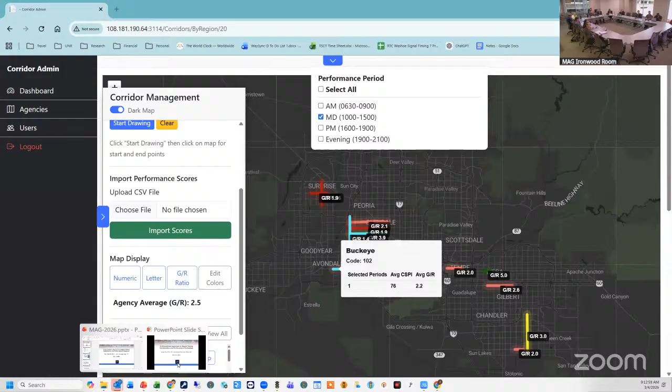Thank you, Mr. Chair, members of the ITS committee. Dr. Tian had a presentation at the most recent edition in December, I believe it was, in the ITE Journal talking about this topic. And given the work that the region has been doing on reassessing the TSOP program that we have in the region, I thought it was a timely discussion to have, especially given that many of you are familiar with the software platform that Dr. Tian has developed. So with that, we wanted to invite him to speak to us today and provide some unique insights that he has on this topic. Dr. Tian, the floor is yours.

Thank you, David, for inviting me to talk to the group. Yeah, I did plan to be there in person, but something happened. I couldn't be there. So I'll be really happy to talk to you about some of my insights about your program and maybe offer some suggestions.

The things I'm going to talk about today include these items. First, we'll briefly discuss your TSOP program: primarily, what has been done right and what could have been done better, in my opinion. The second, which is important, is about how we evaluate the signal timing, particularly coordinated signal timing on the corridor.

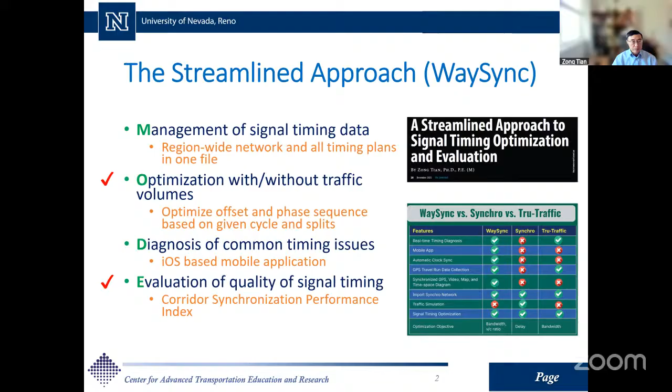Focusing on four different things, I call it a MODE approach: managing signal timing data, optimization with or without traffic volume counts, diagnosing common signal timing issues, and the evaluation of quality of signal timing. For today's presentation, I will be mainly focusing on two things: the optimization part and the evaluation. So let's take a look at the TSOP program. As I mentioned, what I think you have done well and what could have been done better.

In the program, signal timing has been done by consulting companies. Most consulting companies, I guess as required by MAG, need to show proof of validation using WaySync to make sure the timing developed can actually match what is running in the field. So that is really a positive thing. Because in most other places, everything looks good on paper, but when you go to the field and drive, it really doesn't work the way shown in the model. So WaySync provides this kind of validation. That's a positive side.

The other thing is about the evaluation. In signal retiming, the current practice is a before-after comparison. The positive side of your evaluation is that most consulting companies use a third-party independent data source, in this case INRIX travel time runs. That's an independent data source, which is very critical. You don't want the people who perform the signal timing to also collect the data and do the evaluation themselves. But I noticed the evaluations were still done by the firms themselves. So I think evaluation should be done by an independent third party. That's what I would suggest.

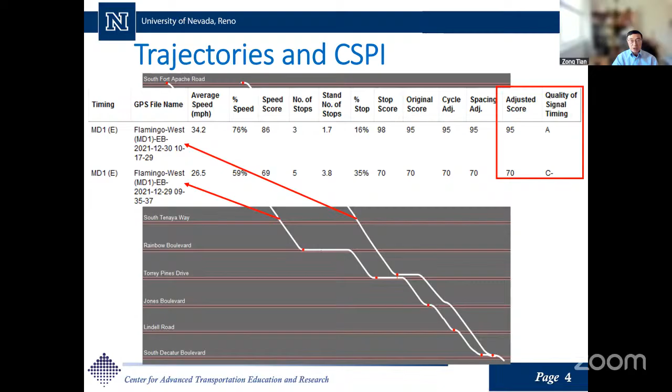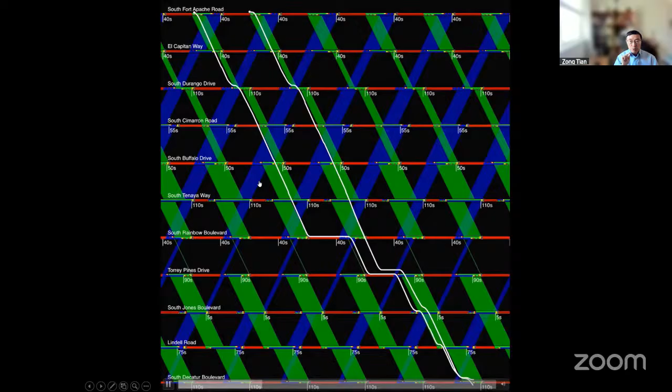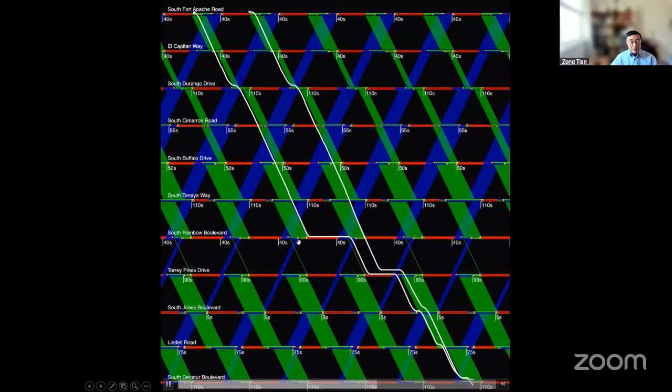What I want to show you next is why these 2 vehicles made these stops. From the trajectory alone, again, we couldn't tell the reason. But if we pull out the signal timing, now you see the true time space diagram. So the green is the band going this direction, the blue is the progression green band, the green wave going the other direction.

Now everything makes sense. You can see this one couldn't catch that green band, so it made a stop, and then because there's no green band here, made another stop. Versus the second one, probably this guy ran the yellow, you can tell, barely made it through the first one, but there's no way he can go through this one. So that's where the stops occurred.

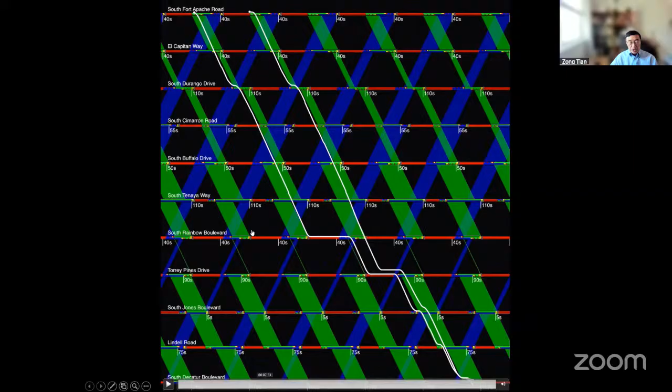So the time space diagram with the trajectories, this is what I'm talking about. If I see this, then I know why those stops occurred. I can also tell the signal timing, and you see there's not a green band. So there's a great potential to improve. Again, here is kind of a visualization. On the left, I just re-show the trajectory on the time space diagram.

On the right is the mobile tool, where you take this to the field, you drive the corridor, it will tell you whether the timing matches or not, and where you should expect to stop. For example, here you can see because it's out of the band, there's a short stop. So in 2 seconds, it's going to turn green. Here there was supposed to be another stop, but on the side street, there's no vehicle. That's why the green returned earlier.

So the next one is already green, so within the green band, you should be able to go through. Now see, this one is out of the band. That's why, in 1 second it's going to turn yellow. Now you made a long stop here, so you have to wait.

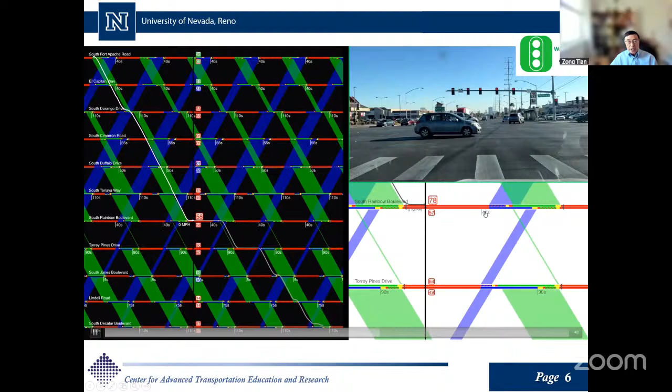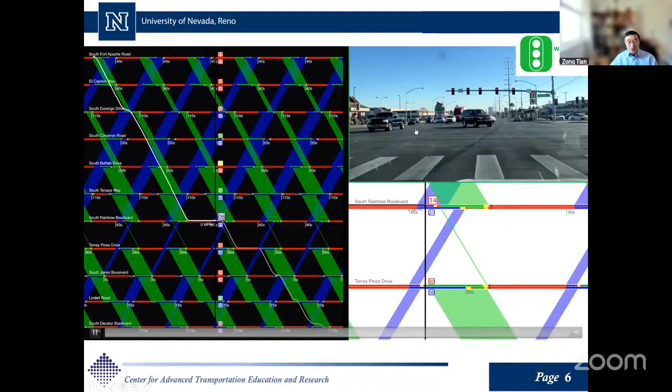So you can see the blue, the other direction, is going to start first, the left turn and through. And then in about 10 seconds, at the latest, this should turn green. Okay, now it turns green. So you can see there's no green band. That's why there will be another stop. So this is to show the time space diagram with the trajectory.

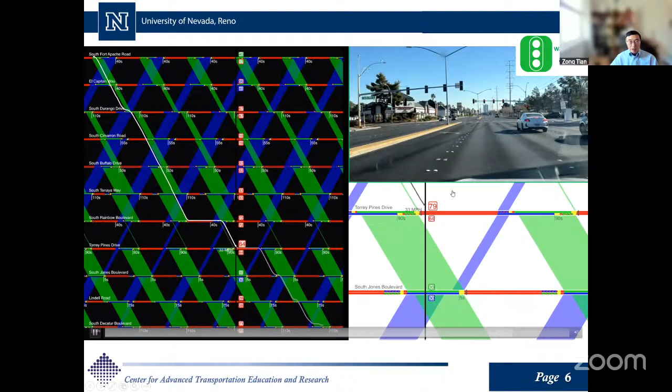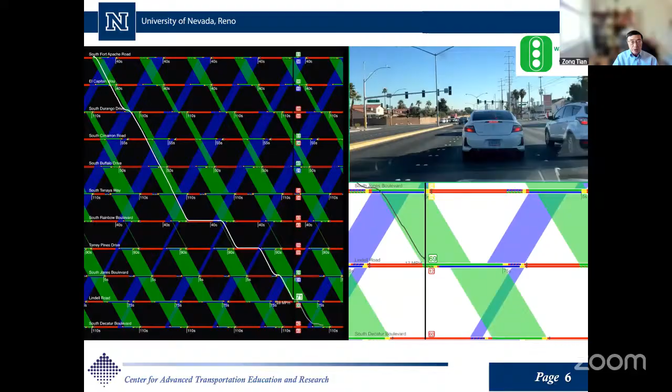On the right, I just want to give you an idea how signal coordination works, how to read a time space diagram, because not everybody in this group really works on signal timing actively. All right, so I'm going to show you just one case, a real case. This arterial is in Orange County, California.

I already talked to David, I mentioned Orange County has about 2,000 signals. Their annual budget on signal timing is $20 million. Not all of it is on signal timing, I would say about 20% on signal timing, 80% on equipment and facility upgrades. But still, that's pretty significant, $20 million per year. So this is one of their arterials in Yorba Linda.

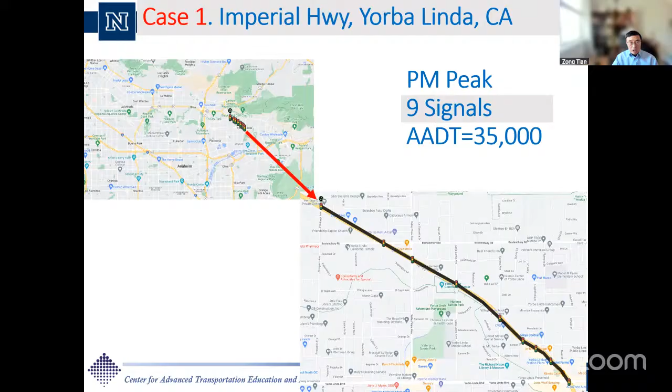So these are the trajectories I mentioned from the automated, we call it connected vehicle trajectories. And you can see this is going southbound, this is going northbound. And you notice going northbound, everybody stopped here. So going southbound looks pretty good. There are some stops. So the question is, is this considered good or bad?

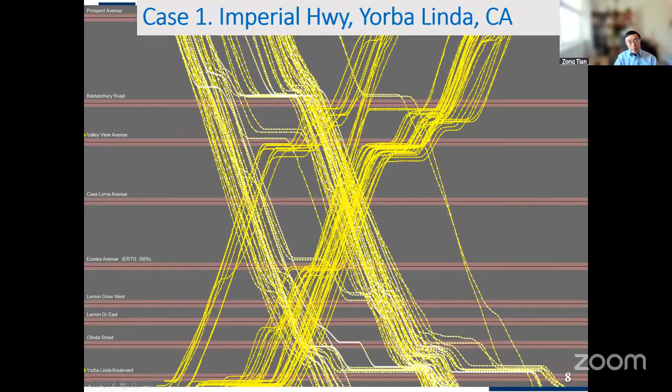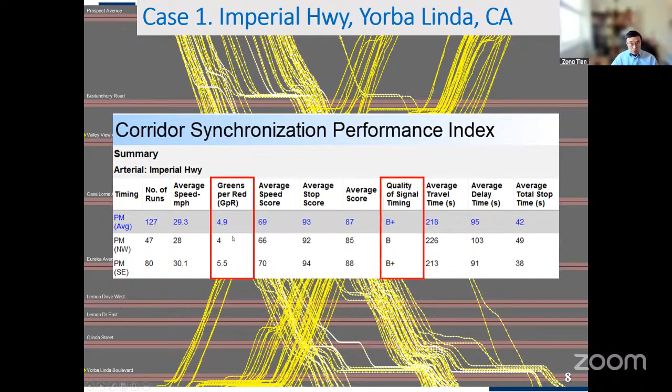If we provide this performance index, then you can see the quality of signal timing, or the performance index, is rated at B+. And there's another parameter, it's called greens per red, or green-red ratio. So this means on average, if you traverse the corridor, you go through 4.9 green lights before you hit a red. So I want you to remember this number, okay, 4.9 for this corridor. Okay, so this is a very well-timed corridor. In Orange County, their county average is less than 2. So this is, I would say, one of the best.

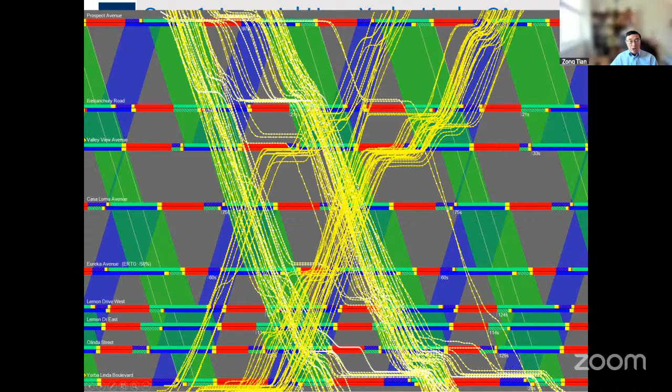But the question is why these stops occurred. Can we still do better than this one, even though it's already pretty good? And once I put the true time space diagram laid over with the trajectories, then you can see there's really no green band here, the blue color. That's why almost every vehicle stopped there. Okay, so how can we quickly improve? We just use whatever the existing cycle and split, do a quick optimization. Now you can see this band, you open the band. So this is how quickly, at some locations, you can just do a signal retiming without going through the volume counts.

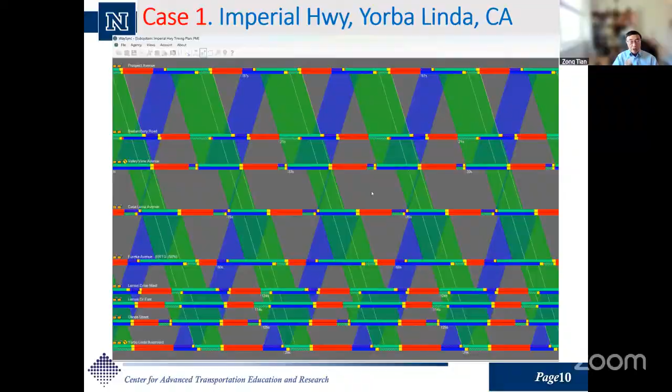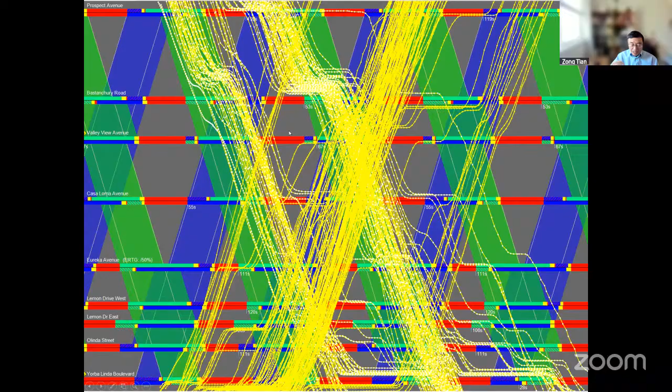Now here is the trajectory after the retiming. You can see, again, the trajectories laid on top of the time space diagram. And you can tell the northbound is doing a lot better. And southbound did have some stops here. So I did this pretty much just in a couple of hours. If I had more time, I would move the offset of this one a little bit further back, pull it like 10 seconds back to avoid this stop. But I didn't have time to do that. But still, if you compare the before and after, as I mentioned before, B+, now is A-.

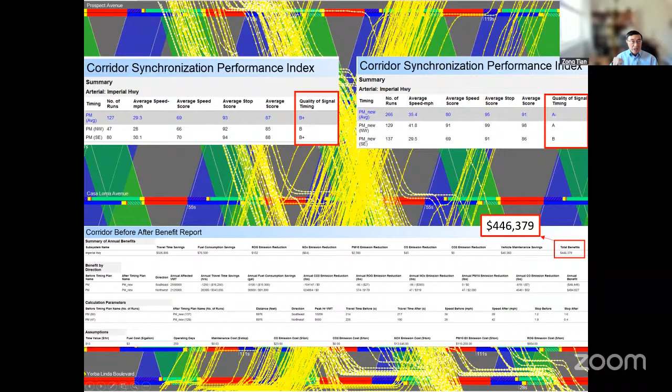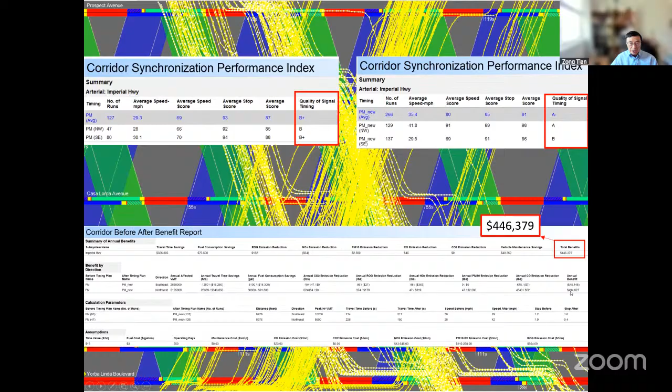Okay, so translate into economic savings. So this timing, this is the PM peak, about 3 hours of operation every day, is still close to $500,000 saving. And you look at the bi-direction here, you can see the southbound direction is a negative. That means it's actually getting worse, but the major improvement occurred in the northbound. So this is just one of the case studies I have done.

Now, the question is, how are the corridors that were retimed through the TSOP program performing? So we do have an interactive map. Maybe I have time to show you. So this is the interactive map here. Okay, so you can see these are the corridors that were retimed in fiscal year 2024. So if you want to look at this index, you can also just look at which time period. I usually start with midday because midday usually is not congested. And if the performance is still not good, that's most likely because of the signal timing. So you look at the index, then you look at the green-red ratio.

Okay, so remember the green-red ratio on the corridor on Imperial Highway, I told you, is 4.9. But in this case, the majority is less than 3. There are a couple good ones here, like this one is 5. So this is Main Street, and the other ones are mostly less than 2. And then if you look at the PM, of course, it's going to be worse because PM in general is more congested. Okay, so let me go back to the presentation here.

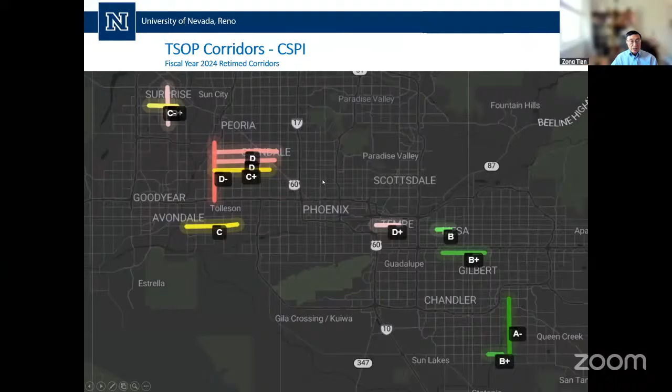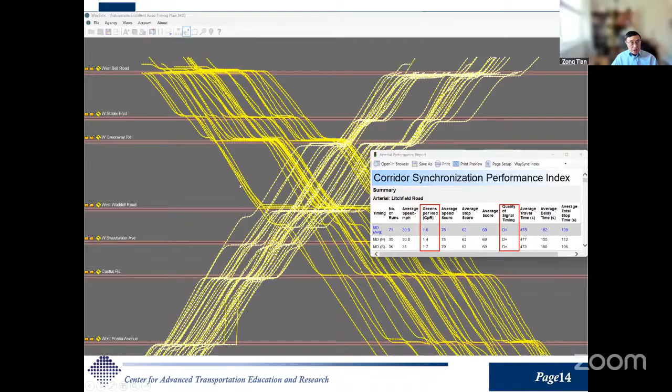So this is just to show some of the corridors. This is again midday on Litchfield Road, and these are the performance index. This is the green-red ratio. You can see it's less than 2. And these are the trajectories from connected vehicles. You can see where they stopped. So there's no oversaturation, but there are still a lot of stops. This is another corridor on Bethany. Hopefully I say that correctly. These are the index. This is the green-red ratio. And you can see there's no oversaturated intersections, but there's still a lot of stops.

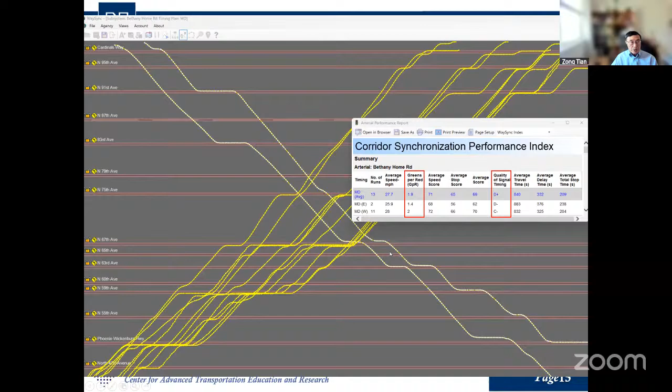Okay. Well, this is the one on the AM peak on Camelback Road. You can tell this is going eastbound. Eastbound definitely is the peak direction. Westbound is the off-peak direction. There are a lot of bottleneck intersections going eastbound. When I say bottleneck or oversaturated condition, it means you can see the vehicles cannot go through in one cycle. So at this intersection, this vehicle has to wait for like 3 cycles in order to make it through. So there are a lot of bottlenecks.

Of course, it's going to affect the performance, but in the off-peak direction, there's no overcapacity, except there's one here. See, this one did take 2 cycles to go through, but most of them can go through in 1 cycle. That means it's not oversaturated. But because of the high number of stops, that's why the performance is still not good, okay?

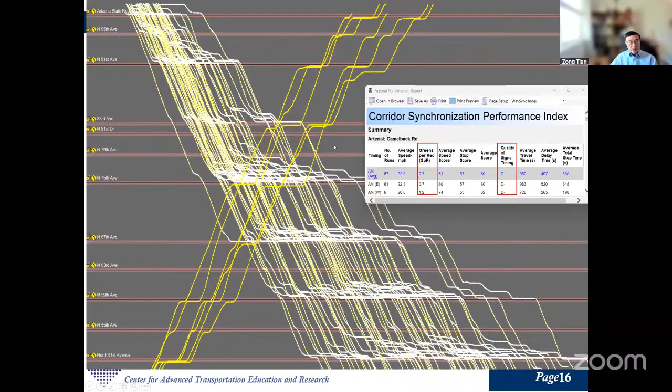And then I look at the signal timing. In the report, I found this signal timing. They did use the WaySync to collect the travel runs. You can see in this direction they provide the entire green band to this peak direction. But because of the oversaturation, it's not really being used. You can see you couldn't really use the band. You have to go through in several cycles. And versus the other direction, not oversaturated, you still make a lot of stops.

So this is where I see, for doing signal timing, you cannot just run the model and put it on. It needs a lot of fine-tuning, engineering judgment. Well, the performance is not satisfactory, but I do see there are reasons behind this.

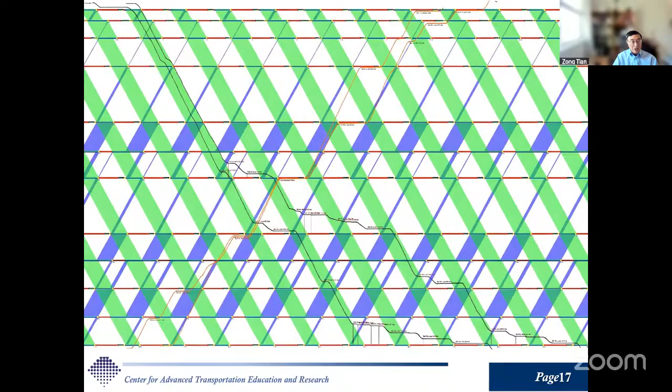One of the things I want to talk about is the protected permitted left turn. I realized that's significantly used in Arizona. I'm very familiar with Tucson. In Tucson, most of the intersections have the 5-section protected permitted left turn, and they have a fixed phasing sequence. Left turn is always lagging. In the Phoenix area, I didn't realize, because I looked at the signal timing the consultant did, most of the arterials, their signal phasing sequence is fixed. It's always left turn leading. So there's no lead lag.

What I want to show you here is I just picked 2 arterials. This is in the City of Phoenix. I have their signal timing, and I want to show you. So this is one of them. I'm opening the midday timing plan. You can see that these are the left turns. You can see the left turns are all leading, okay? So all the left turns are leading.

So if we run the optimization and we lock the phasing sequence, that means don't change the sequence, this is what you get. You look at the bottom, there is a 2-second green band, a very narrow green band. But if we can get rid of this restriction, allow the phasing sequence to change to be lead lag, now you get 22 seconds. It's 10 times bigger than when you have a fixed sequence.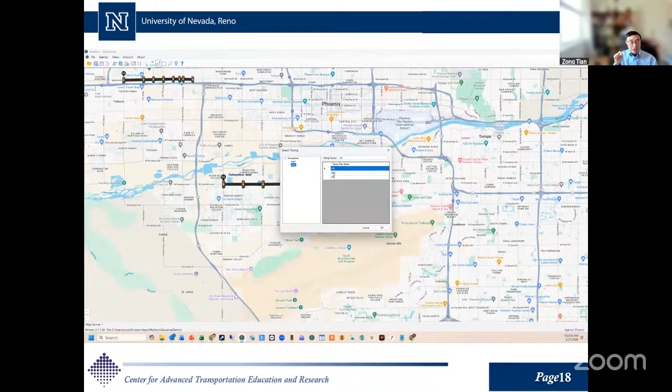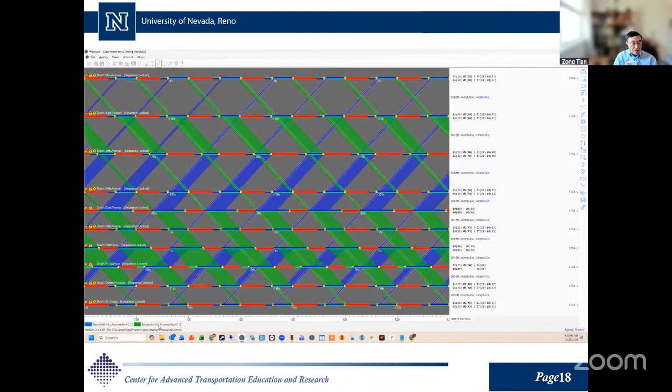The second one is the same thing. Opening the midday timing plan, you can see the left turns are all leading there. Okay, if we run an optimization and lock the sequence, this is what you get. You can see there, you get 5 seconds in both directions. But if you take out this restriction, this is what you get. Now it's 25 seconds, still 5 times what you had with the fixed phasing sequence.

So what I want to say here is that if you really want to improve the corridor coordination performance, somehow you need to find a way to be able to change the sequence. If you have a lot of permitted left turns, changing to flashing yellow arrow is one way of doing it. But I know it takes a lot of effort. You may get a lot of resistance from the citizens.

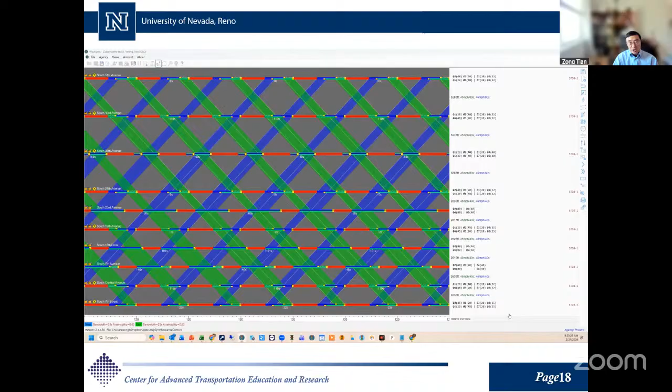Like Tucson, we did try, because I told them, if you don't change the sequence, you probably cannot really do much with improving the corridor performance. But the citizens are so used to lagging left turns. If you change the sequence, everybody complains. So I know that you are going to face these challenges, but I do just want to point out how important phasing sequence is to signal timing.

So with that, I think I'm done with what I want to tell the group. I'll be really happy to answer any questions if you have them. Are there any questions or comments?

Mohammed? Yes, my question is related to the green, or what you call GPR, and then you have the grading criteria, D+, D-. What determines that? What level of GPR, green per red, I believe that's what it means. Can you explain that, please?

Okay, green per red. Let's say if the number is 3, that means on average you go through 3 green lights before making one stop, where you hit a red light. That's why it's called green-red ratio. This directly comes from the trajectories, from the field travel runs, right? Then your question about the quality index, the D, A, B, C. How do we determine what is A, what is B, what is C, what is D?

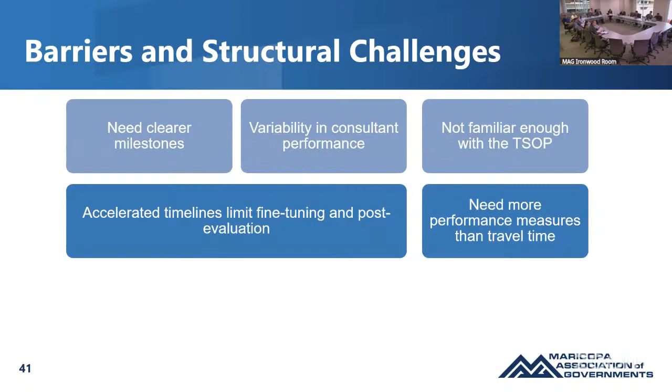Once again, we touch on the consultant experience. From the feedback we received from member agencies, there's a little bit of inconsistent consultant performance noted. So that's what we will try to address in our future TSOP program. How do we do more data-driven, more streamlined project selection? For example, we need region-wide data coverage. We need more information available to help us prioritize and evaluate the projects.

And the timeline is pretty long. How can we make it a little bit more compact and be able to capitalize on the effect of this program within a shorter duration? That is being recognized by our member agencies.

And then what exactly is MAG's role in the TSOP? They all think MAG should really be serving as a regional technical resource and a data hub, providing centralized information to help with our agencies' needs. And there's also a majority really interested in expanding the data access and analytics support regarding the TSOP.

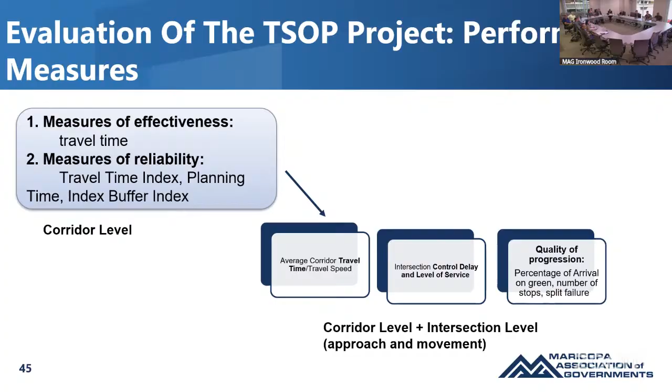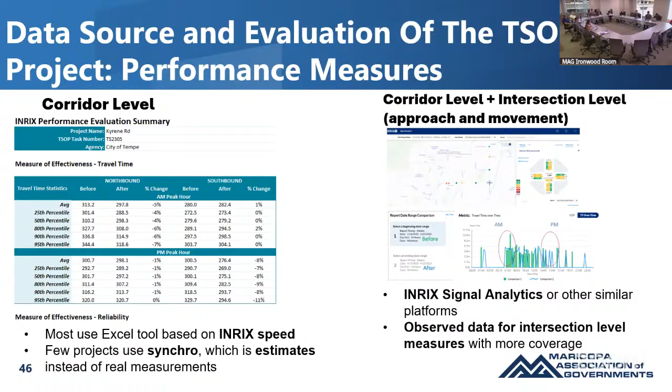Based on our peer agency review, surveys, interviews, and our evaluation of different data sources and the projects, we developed several recommendations. We developed 7 short-term recommendations, which will strengthen MAG's TSOP into a performance-based, data-driven, and regionally coordinated framework. Next, I will introduce each of the short-term recommendations.

The first short-term recommendation is refine program structure. We recommend streamlining the approval process. We also require MAG management to review and approve the project, and to spread the projects across the entire fiscal year to balance the workload and data collection.

The second short-term recommendation is enhance consultant selection process. We recommend revising consultant selection procedures, prioritizing consultants with local experience and proven TSOP performance. We also want to include agency feedback when selecting these consultants.

The third recommendation is improve inter-agency coordination. We want to facilitate more structured collaboration among agencies, especially for multi-jurisdiction corridor projects. We want to determine shared standards for signal phasing, pedestrian timing, and coordination. We want more joint projects and zone-based planning projects, and stronger coordination to improve regional continuity and knowledge exchange.

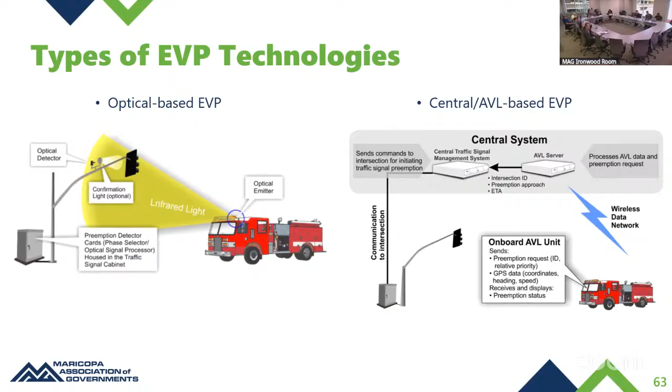And the central or AVL-based EVP we are piloting in this project is shown on the right-hand side here. Essentially, you no longer need to have specialized hardware installed at intersections. Instead, you rely on the automatic vehicle locator, AVL, which is already reporting where emergency vehicles are and what's their status to the dispatch centers. And because you know where they are, you can set up geofences at intersections to trigger the EVP call if your TMC or TOC has communications to your signals.

And for this particular pilot project, this is the data flow chart we have. It looks very similar to the conceptual diagram in the previous slide, so I won't go into too much detail here. One thing we do a bit different in this project is instead of integrating with the existing AVL, due to the budget and time constraints, we opted to buy a transponder from HAAS Alert to install in the piloted emergency vehicles.

Also in this case, the central-based EVP technology provider is called LYT. They have different solutions, but for EVP, the product is called LYT.emergency. And the Tempe TMC already has communications to the signals, so the vendor allows you to install a hardware or a virtual machine in your network to be the gateway between their cloud and your signal central software. So in this case, we installed a virtual machine in one of Tempe's workstations to work as that bridge between the AVL data and the signal EVP calls.

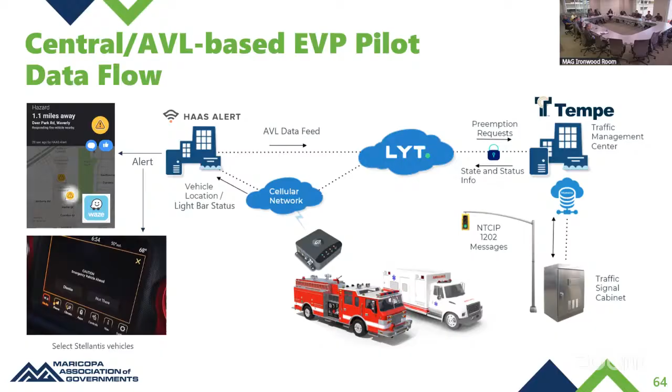And one bonus feature we actually got from this project, not originally intended, is the HAAS Alert transponder is also able to send out alerts to the traveling public about emergency vehicles or emergency scenes. The screenshot shown here is when HAAS Alert sends out emergency vehicle approaching alerts to those using Waze navigation apps. And the bottom left screenshot shows some select Stellantis vehicles can also receive those alerts in the infotainment system. So we also got to try that feature in this pilot project.

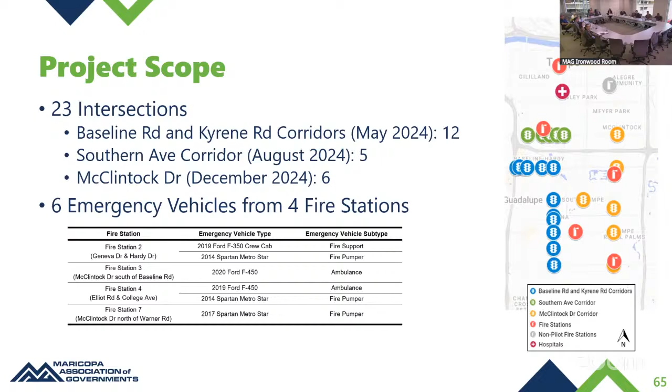So very briefly, the EVP solution provider has its own dashboard showing the real-time status of the signals involved. And also from the AVL data, we know the real-time status of those fire vehicles, where they are, speed, light bar status, if they are responding to a scene or not, which is a condition of whether it will trigger an EVP call or not. And as a byproduct of that, because it's also getting SPaT data from the central system in Tempe for those intersections, we get a very detailed view of those signal statuses as well in real time.

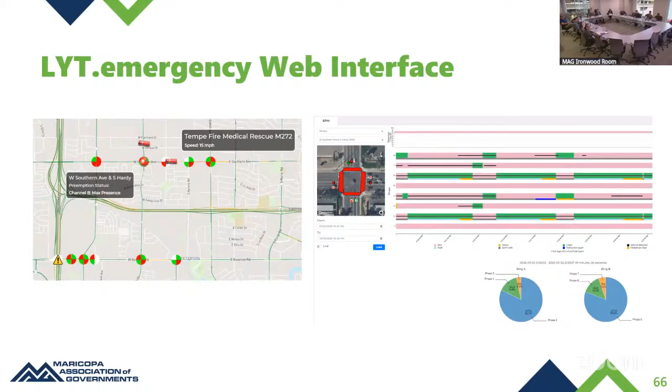One thing I put a highlight here is the R2R, which stands for responder to responder alerts. In that month, actually, there was one responder to responder alert sent out. And that is because I think City of Phoenix is also using HAAS Alert in their emergency vehicle fleet. So they probably opted to equip the flashing lights inside the vehicles. So when there are two vehicles equipped with a responder approaching a certain intersection, they actually have a functionality to send out responder to responder alerts to notify the other responder that, hey, there's actually another emergency vehicle approaching the same intersection as you. So be on the watch out for that.

We didn't have that add-on in our pilot project, so that's why the R2R alerts received is 0 for our pilot. This is only for our interface. So on the Phoenix side, I assume they probably have numbers here showing the alerts they received from the Tempe fleet installing this transponder in our pilot project. Just an interesting side note to highlight here.

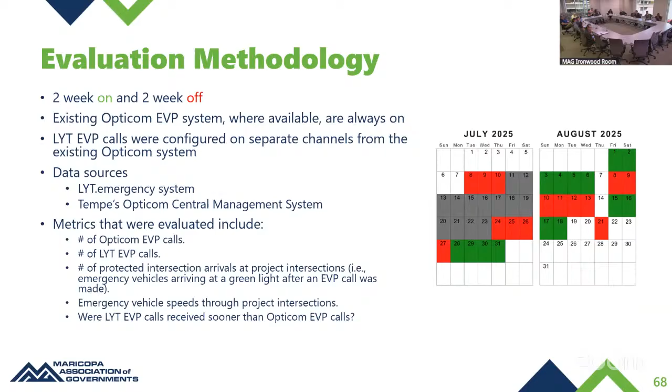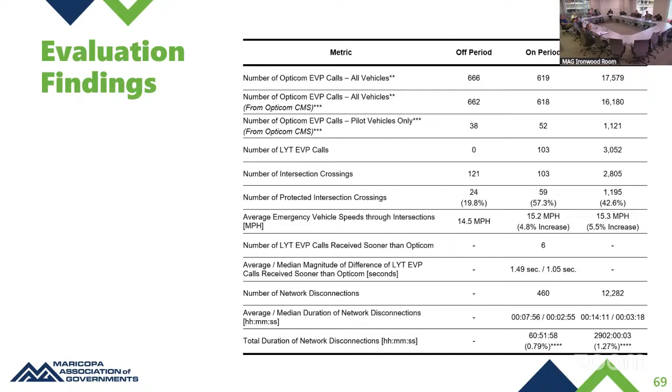The first one is the off period, when we turn off the LYT system but the Opticom is still on. The on period, when both Opticom and LYT are on. And the full project period across that 2-year period. Just for reference, if you remember in the previous slide, we turned on different intersections at different times, right? So it's a bit noisy for that full data period column, but I include it here for your reference. Some of the high-level findings I want to highlight here.

First of all, if you look at the on period and compare the number of calls made by Opticom and LYT, you will see that LYT reliably makes many more EVP calls than the Opticom. The third row shows the number of intersection crossings, because from the LYT solution we know the AVL traces of the vehicles and their light bar status. So we know exactly how many signalized intersections they cross when they are responding to an emergency. And you will see that the LYT EVP calls match that number exactly, meaning that for each of our emergency responses, when they cross an intersection, they correctly send out the EVP calls.

Secondly, we look into the number of protected intersection crossings between the off and on periods. Again, the only variable here is whether the LYT system is off or on. And you will see, both in terms of percentage and number of protected crossings, we got much higher numbers when the LYT system is on in these pilot projects. The next highlighted comparison is the average emergency vehicle speed through intersections when responding to a call, and we see a slight increase there as well.

One thing that was a little bit unexpected to us is the last highlighted cell here. Of all the 52 EVP calls that both LYT and Opticom sent out to the controllers, only in 6 instances was the LYT EVP call actually received before Opticom. We initially thought we would see a totally different picture, because if you know how the Opticom works, you need to set a certain range for the Opticoms, right? But for LYT, you essentially know where the vehicle is all the time.

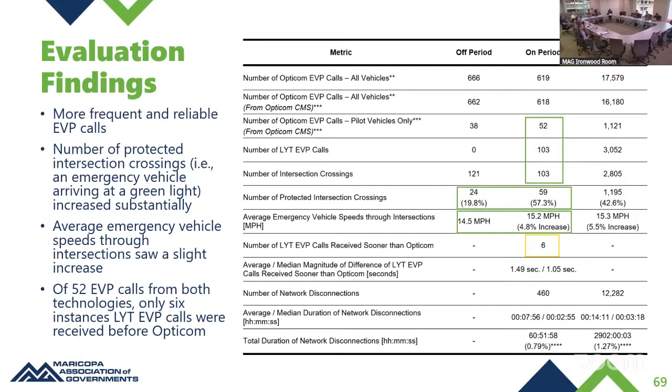So we suspect there are multiple reasons here. First, the region has a pretty standard grid network across most of the network, so you actually have pretty good line of sight for the Opticom solution. We don't really have any road curvature in this pilot project, so there won't be many cases where line of sight itself is an issue for Opticom. The other thing is, when the LYT system is set up, they draw the geofence boundary for each intersection based on the speed limits and signal timing plan. So there might be a difference between that geofence range and the Opticom range that has been set up. So we suspect there are multiple factors in play here.

And just to conclude, the overall key takeaway for the project is that we do see quantifiable improvements over the existing solutions we compared in these pilot projects. We also observed and confirmed a couple of qualitative improvements as well. First of all, the main issue we heard about the optical-based solution is the effort and cost to install and maintain the hardware, right? But for central-based EVP, you don't really have that. Especially if you rely on the existing AVL already installed in the vehicles, you don't even need to install an actual transponder.

And you are getting additional data to evaluate the EVP performance, right? Rather than only relying on the signal controller log, now you have AVL data to see where the emergency vehicle actually goes, and that helps you evaluate the EVP performance rather than waiting for your fire departments to give you feedback that at so-and-so intersection it might not be working as intended.

A couple of future notes for consideration: we had a limited budget, so we worked backward to see how many intersections and vehicles we could accommodate for these pilot projects. In retrospect, to meaningfully evaluate this type of solution, you really need a network effect of enough signals and enough vehicles participating. So that's definitely one of the considerations we recommend for future deployments or pilot projects. And also, we are not using the technology to its full potential because we didn't actually integrate with the dispatch information.

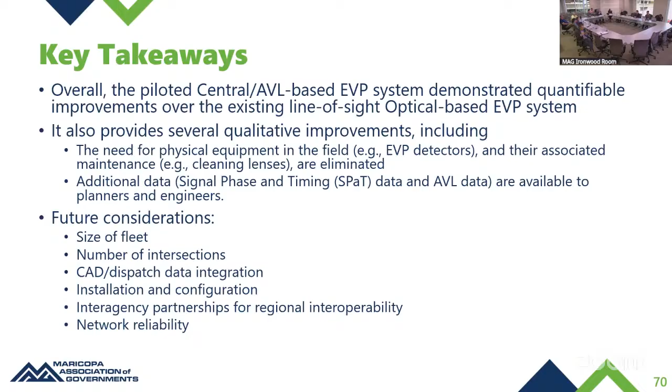So I definitely recommend whoever is considering these technologies, if your signal central system doesn't log the network disconnections already, you might want to look into that to understand how much uptime you actually have talking to your signals over a longer period of time. Because when you lose connection to your signals, the central-based EVP won't work, obviously, because you can't send that EVP call to the intersections. So that concludes our presentation.